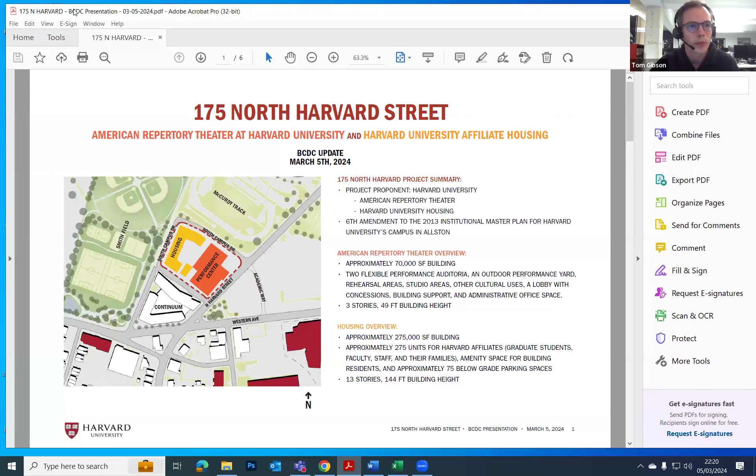Hi everyone, this is Tom Gibson from Haworth Tompkins Architects based in London, as you can probably tell from my accent, and let me share the screen. Sorry, I thought Tyler would be doing a quick introduction, but I'll dive right in. Hey Tom, I can talk now, but I'm Mark Hanley from Harvard University. I think the context is fully covered. We've seen BCDC subcommittee and the full committee on the 5th, as was just mentioned, and I think the narrow presentation is quite comprehensive. So Tom, I'll kick it right over to you and we can give the brief presentation.

Brilliant, thanks Mark. I'll very briefly remind everyone about the key stats for both components of the project. As you can see on this site plan, a reminder that the ART Performance Centre is on the eastern side of the block along North Harvard Street, with the Harvard Affiliate Housing Project on the western half of the site. The ART is approximately 70,000 square feet, with 2 very flexible performance auditoria, an outdoor performance yard that was the subject of discussion, and a host of supporting uses including a lobby space active throughout the day, about 3 stories in height. The housing component is approximately 275,000 square feet, 275 units for Harvard affiliates, and about 13 stories high.

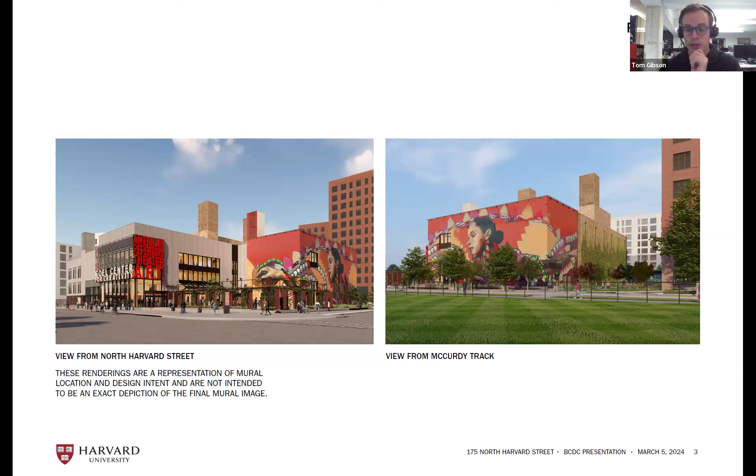We're just about to start a really exciting public art process for the large-scale mural. As you can see, these images show it wrapping around both the east and western sides to define that northern massing, addressing the views from North Harvard Street and Smith Field and across McCurdy Track. We're working with artist Pro Black, who did the Greenway mural last year, and we look forward to continuing the dialogue with the urban design team at the BPDA on the exact artwork as it emerges.

Finally, on the ART, before I hand over to Debbie from Marvel, the yard enclosure and the programming of the yard space itself has been subject to a lot of conversation. The cross section in the bottom right shows a 9.5 foot high solid enclosure with a series of hinged double doors that can open up to make it a porous space, or closed off for events depending on the programming. At high level, we have a lightweight armature used for fixing speakers and lighting, deliberately designed to announce the space as a working outdoor studio. The whole enclosure is softened with a trellis and vertical climbing plants, and you can see the edge planters on the plan on the left hand side.

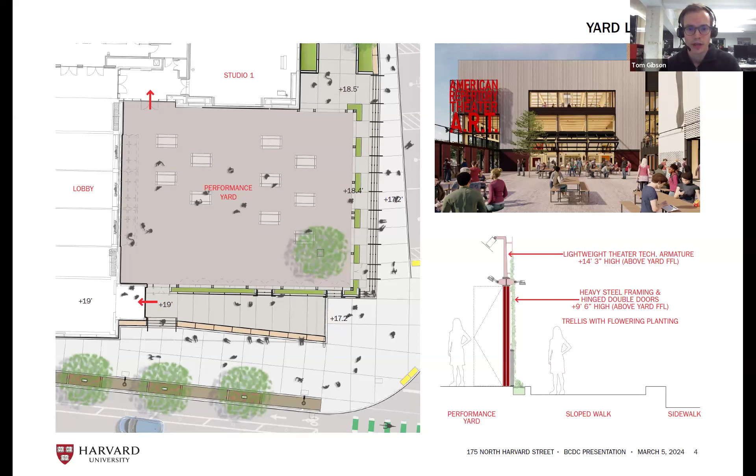You can see here the materials we've selected are meant to convey a sense of durability and permanence typical of Harvard buildings. All of the materials we've selected are sourced locally to comply with our rigorous Living Building Challenge and LEED requirements. We worked closely with brick manufacturers to find brick blends that feel contextually appropriate to both the Allston neighborhood and Harvard's historic red brick campus. The granite watercourse, pavers, and gray metals evoke similar palettes in the area, and blue townhouse doors add a pop of color at the residential scale.

In response to feedback from BCDC and BPDA to make the building feel lighter, we've added the light gray base at the townhouse level and moved it up a bit. The middle of the building is the red university blend brick, which we've detailed to break down the scale through a woven pattern with brick articulation. At the top of the building, we have an articulated brick cornice which completes the woven pattern. Our intent is that as the sun moves throughout the day, light and shadow will emphasize the woven brick textures and depths differently over time, allowing the building to mark time as it passes. We will continue to work with BPDA throughout the visual mockup process to optimize the legibility of this woven texture.

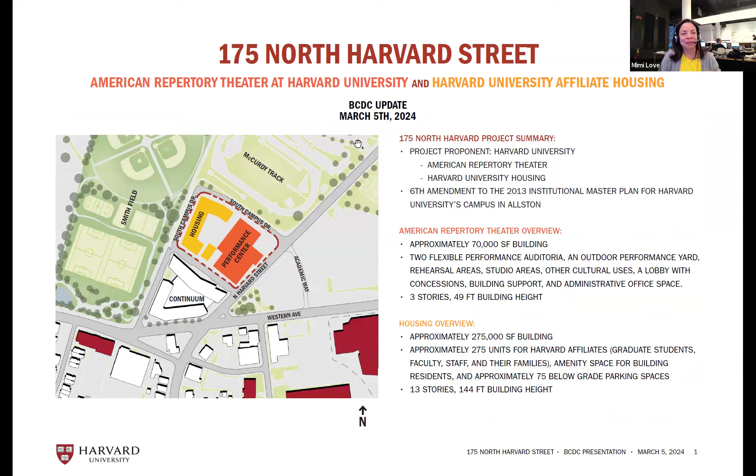Maybe if we go back to the site plan, I was really excited to see this project again, because when we last left it, maybe a zoom in of that landscape plan, we definitely had some concerns, and I was very much looking forward to seeing the development of the landscape in the quad space, and that central space between the performing arts center, ART, and the housing.

And while I can see that it significantly changed, if you can go to the rendering with the former lawn that is now a deck, perfect. So there's been significant changes. They still feel a little bit conceptual to me. And I was hoping that in this presentation, we'd see a little bit more development.

And in particular, I'm just looking around the edges where I see the playroom, the gym, the lounge, all touch where there's a zone of green that touches these spaces that really should connect indoor to outdoor. It seems to me that this is still very conceptual and schematic. And I would hope that as you continue to work with the BPDA on developing the landscape, there's a lot more attention to connectivity and the porosity of inside and outside. And just thinking through all of the spaces, it's too zoomed out to honestly talk about it in depth, but I was hoping to see a little bit more development in the landscape, because that was pending when we last reviewed this project.

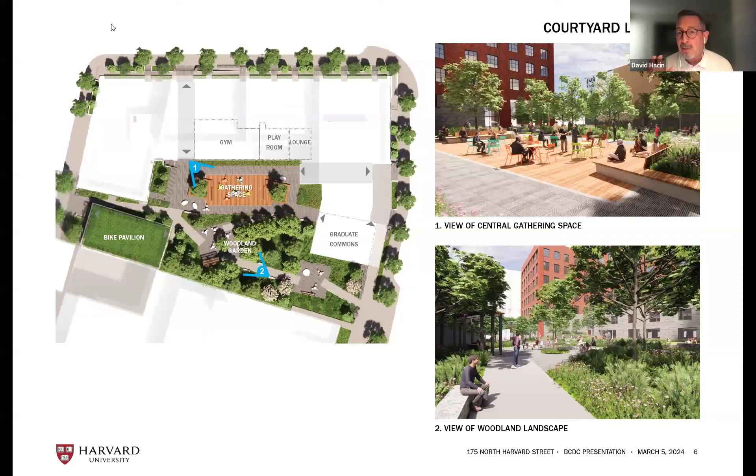I just wanted to say, Debbie, that I see now what you're talking about as I look closer. I don't know if it's an issue of cost, but I love that idea and I would hope you can make it a little more emphatic so that it reads. For all the conversation about sun, we don't get as much as we would like, and I think some of those details need to be a bit more pronounced in a gray Boston context in order to read clearly. So anything you can do to pump that up would be great. Just my thought.

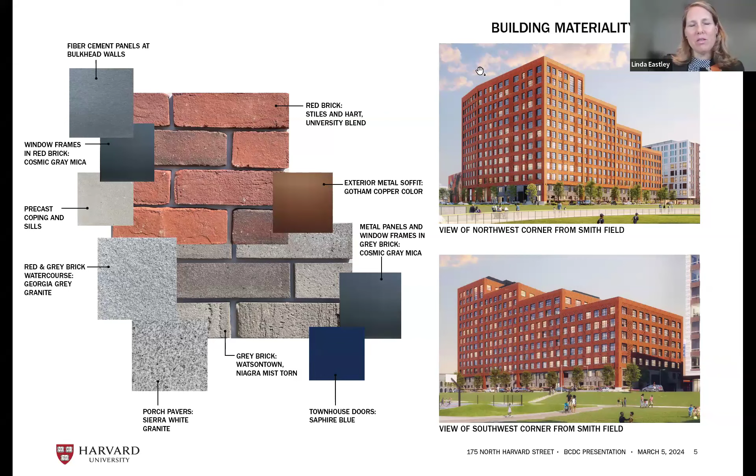But I think the notes that both Mimi and Catherine shared are really important, and I'll add my own, which is that the landscape doesn't feel as holistic as it could. It feels like there are individual moments linked together with a path, but the programming could be a lot stronger. This could be a really wonderful space, not only for residents but also for art patrons, so really encourage you to continue working with the BPDA on strengthening that.

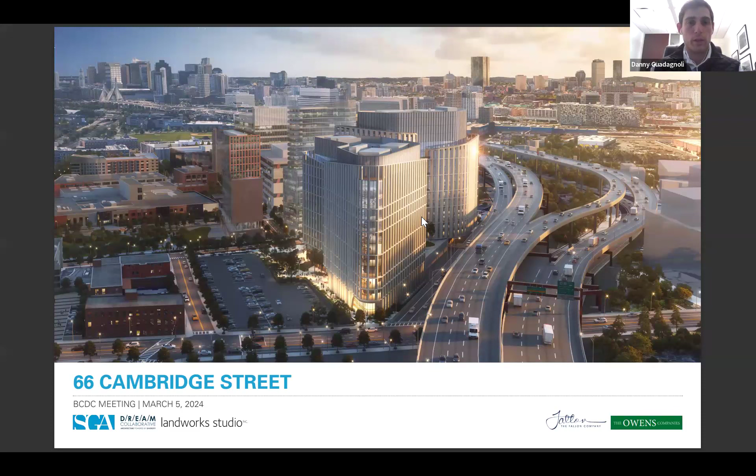Can everyone see my screen okay? Yes. Great, great, excited to be back. Commissioners, BPDA staff, thank you for the time tonight. We're grateful to be back at full committee. My name is Danny Guadagnoli, I'm with the Fallon Company, joined by several colleagues as well as Joe Mamayek from SCA and Andrea Veruti from Landworks Studio. We're here to talk about 66 Cambridge Street, so we'll jump right in.

Here's the project at a glance, just to refresh everyone's memory. It's a 2-building scheme, 812,000 square feet of development geared towards life science and R&D uses, about an acre of open space. If you're looking at the page, to the right is the north building, to the left is the south building, and I-93 runs north to south behind the two buildings. From a site plan perspective, a couple big things to highlight here.

This was really the relationship our site has between Hood Park on your left and the MBTA Sullivan Square station on the right. Right now this is currently a parking lot and really not navigable for pedestrians. So we wanted to create a pedestrian spine that was the backbone of the project, buffer against the highway using the buildings, and a really great front door experience here on D Street.

In terms of process to date, we're very grateful for all the feedback and engagement on this project from the group, from the BPDA, and the community. It's been about a year since we've been at full committee. Tonight we're focused on these last few bullets, which is what we heard at the last subcommittee meeting on February 20th. I'll walk through them quickly, then we'll jump into the specifics.

The first one is the building entry canopies, making those feel more in line with the overall design of the building. The second bullet is continuing to refine that secondary language within the arcade and improving that human scale design for the pedestrian. And then lastly, pedestrian safety and comfort. We heard some great feedback on the Cambridge Street corner specifically, so we'll get into how we address that as well. And with that, I'll hand it over to Andrea to talk about the public realm.

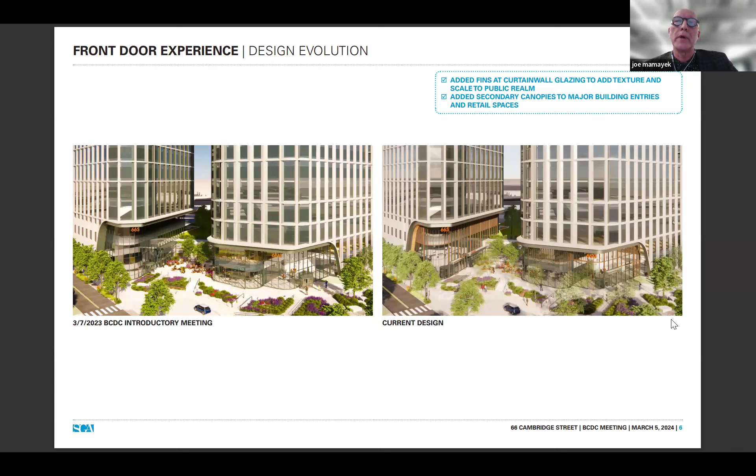They complement what is happening from a retail opportunity and around the main entryway. You can see the graceful transition to the resiliency level, and we've added the architectural fins for that human scale, and also the warmth that is added and works with the nice material choices of the soffit.

One of the big items that we looked at was the arcade and the number of columns. By eliminating every other column, we actually increased the transparency, the natural light that goes into that space, and the sight lines in and around that, which really unified and enhanced that public realm experience.

In terms of the human scale strategies, there are a number of things we've been working on through the last couple presentations. The green items are really the landscape features, the enhanced landscape beddings at the columns, and the canopy trees on the left-hand side. In terms of the architecture, we introduced the architectural fins, we have a digital display, and we have unified all the design for the handrails. Most recently, we had commentary about the lighting.

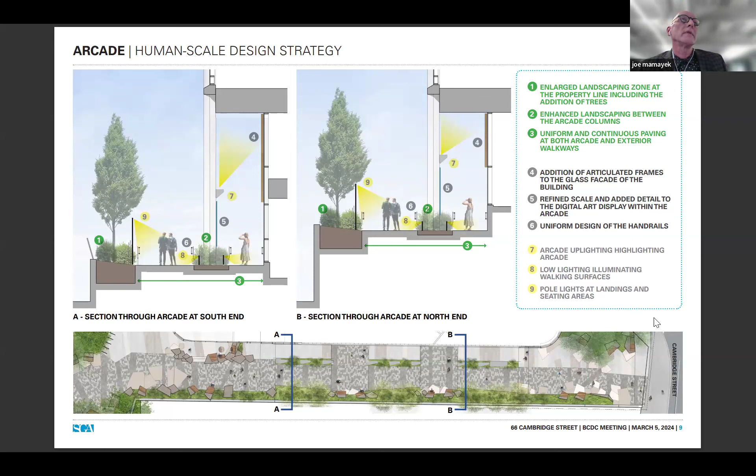In terms of the design evolution, you can see where we were a year ago, and on the right-hand side where the design is currently. You can see by the elimination of the column how that really opens that up, connects the shared pathway with the arcade itself, and lets you begin to appreciate the landscape features as well as the architectural elements that are currently within the arcade itself.

There are a number of complementary views in and around that arcade, some on the outside, a few just on the inside. It's a holistic approach to really make this an improved public realm experience that happens within that zone.

And then the gateway—this point was really key to a lot of the conversations. You can see where the design was on the left-hand side, and on the right-hand side where we increased the scale. We have a 2-story expression ray at the base to start, and that nice articulated canopy that then transitions to one language as it goes into the arcade itself. You can see the architectural fins that come around and give that added scale.

All of this is really featured on and focused on some of our original design initiatives, which is to have that sight line to the Hood stack that you see just beyond.

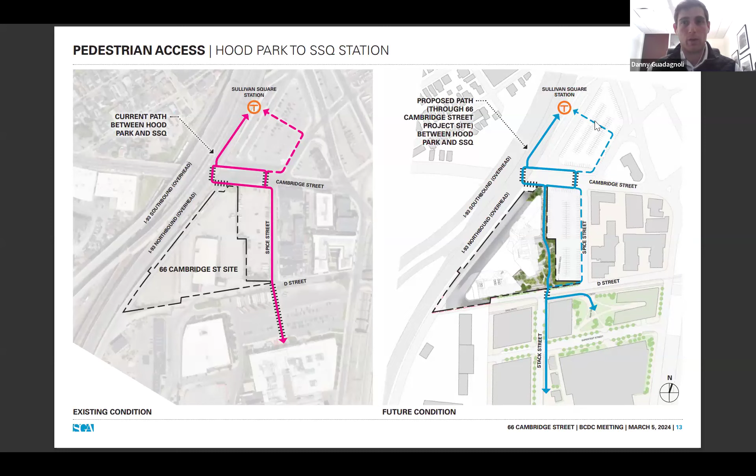So to zoom in on that a bit more, this was really the area that got talked about a lot at our last design committee meeting, and it's very important to us that the safety here is prioritized.

So what we've done, talking to our team at Howard Stein Hudson, is work through a strategy for how we can shorten this crosswalk from 84 feet to 55 feet, in coordination with various agencies—that's something we're committed to. We're also reducing the length of this other crosswalk and straightening it along Cambridge Street, from 62 feet to 55 feet. So those are two major moves.

Thanks, Christina. So those are two major moves we think really enhance pedestrian safety and the directness of that path.

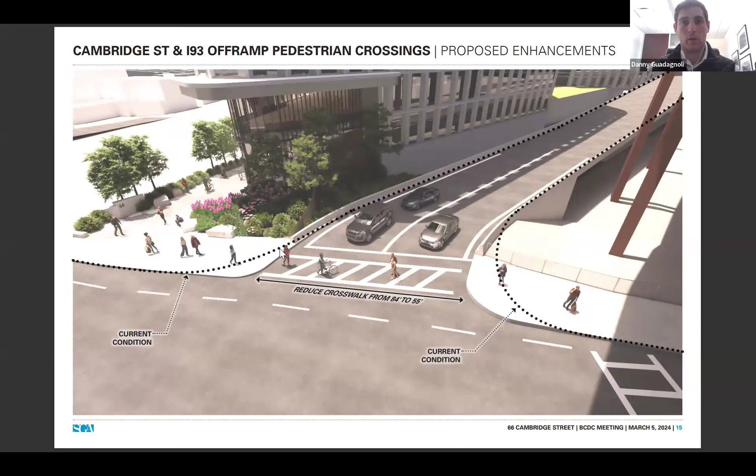You can see here it really does make a huge difference—this dotted line is the current condition, and we plan to bump out these curbs and shorten this substantially. What we've already done, and continue to study, is making sure pedestrians from this platform have a good sight line to see cars and a safe area here as they approach the crosswalk.

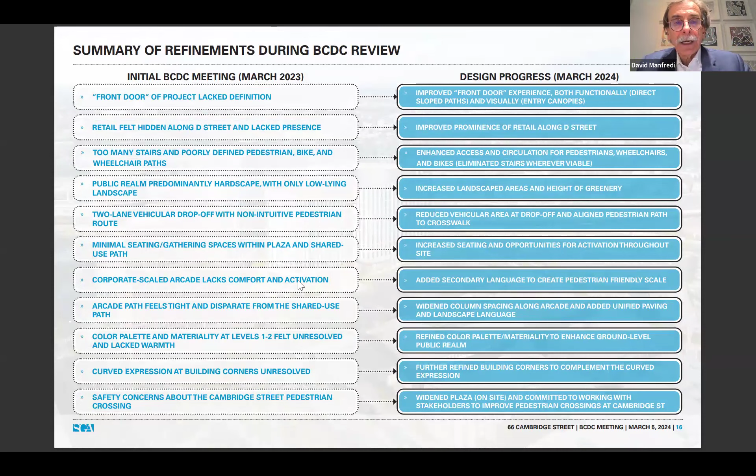First, thank you for your responsiveness. I was at the last subcommittee meeting, and a couple of things you've done I think are really to the benefit of the project. The entrances we talked about very specifically felt attached but not integrated, and a little bit foreign. You made them so much better by simplifying and minimalizing them, and it feels so much better in that context.

The other thing we talked about in subcommittee was the arcade and eliminating every other column. I don't know that I fully saw it last time, but there are two benefits: one, you increase the openness of the arcade, which I think will increase its usability as well as safety, and bring daylight to the ground floor of the building. The other thing I just saw tonight is it allowed you to let all of the remaining columns go to the ground instead of the intersection of the column and the curve, which I didn't realize bothered me until you took them away, and then I felt so much better. So there's a clarity there that's much nicer.

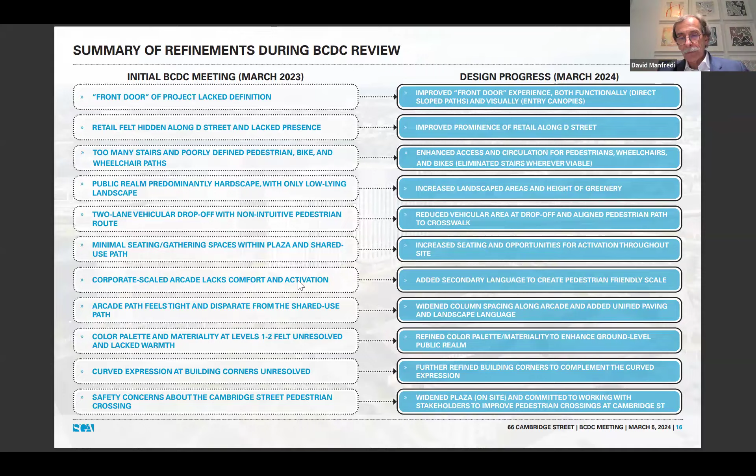There is something in that rendering that bothers me a little. It bothered me the other night, and I'll let my landscape colleagues be more articulate about this, but I think you're creating that zone between the columns with the planter's edge in order to solve some issues between the grade of the building and the grade outside the building, and you need to do something like that. But every time I look at that close-in drawing - yeah, this one, the lower right - it just feels like the green is sort of in prison, captured. I suspect your slopes are such that you need the guardrail and all of that, but I do wonder if any of my landscape colleagues has a better solution for that.

And then my last comment is, if you could go to the intersection we talked about so much in subcommittee - I think this is a tremendous improvement, reducing that crosswalk by almost 30 feet. But let me ask, where are you in the process of being able to do something like that? Do you have BPDA transportation, BTD support? Are we looking at a solution you can really implement? Because I think it's night and day. I want to see it get done, and I know these things aren't easy to get done. So where are you in that process?

I'm wondering, as Anne Marie and other comments come in, can you put up a site plan for us from your slide deck? We don't need to look at roadways at BCDC. Actually, I think we're all excited to see that, since we spent a lot of time on this at subcommittee.

It's a shame I wasn't on a couple weeks ago because this has been in the works, so it would have been a much easier response, but I was on vacation that week with the schools being off. No problem, glad everyone's vision is aligning here, and glad you could join tonight.

Anne Marie: Thank you, I think this is the first time I'm seeing this project, so I appreciate all the effort from both the proponent and my BCDC colleagues and BPDA staff. In looking at it, I still have some concerns about the overall palette. It still seems a little monotonous to me. I'm looking for a bit more; it feels a bit corporate. The only differentiation I see is in the flowering plants.

So I'll defer to my colleague Commissioner Solano on the landscape, but I'd like to see more texture. I was looking for the building entrances - I assume the entrances addressed in prior subcommittee meetings are the gateway into the site. But thinking about the pedestrian experience, these changes feel very fine-grained. It would be nice to see more texture providing diversity in the building. It's a very uniform palette, and some differentiation would help strengthen the design.

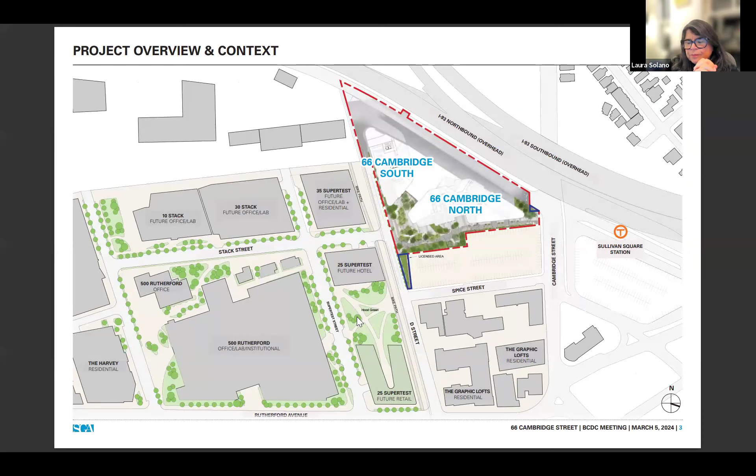Thanks, Anne Marie. Laura, I see your hand up. Yes, can you hear me? Yes. Oh terrific - could we take a look at the perspective that shows the reduced columns?

I think it's an elevation - yeah, we had an early one. There, we go side by side. Oh, I'm sorry, I apologize. Go back to the one you had up - that shows it better. And while you're doing that...

This is perfect. I wanted to thank David for bringing up something that's been gnawing at me, and I wasn't quite able to identify it - it has to do with those plant beds around the columns. I think it's important how those columns come down and hit the ground, and I'm not sure these plant beds, reduced even more by the lessening of the columns - which was the right thing to do - whether they feel like leftover pieces. Could you take that land, it's not much, and add that landscape to the other side so you can get a little more room on that important edge that looks over the parking lot?

Just let the columns come down. I think the grade inside the columns and the grade outside the columns is the same, but correct me if I'm wrong. Correct. Yeah, and if you think about people moving through the space and being able to weave in and out of the columns - in the rain you go under it, come out, and want to weave back and forth - I think you'd get a lot more depth and strength to the edge against the parking lot if you took whatever real estate is given to those plant beds and shifted it to the edge.

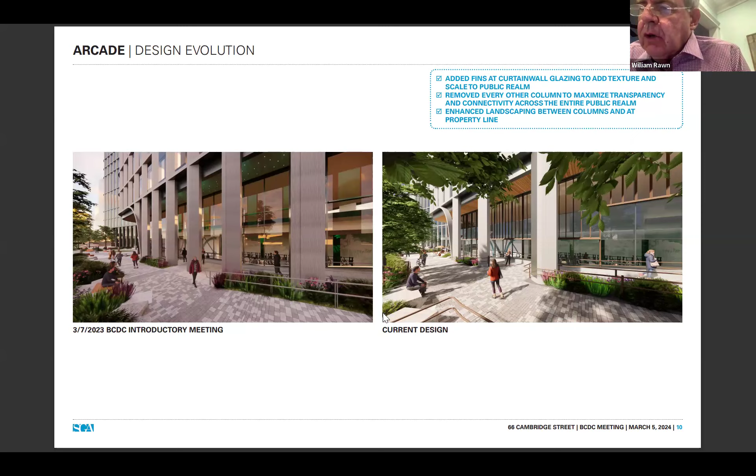Laura, thanks for your comments. Bill? Yes, can you pull out the crosswalk diagrams again?

Yeah, this one for the moment, and then we might look at the other. I appreciate, like David, by the way, I appreciate some of the people cross the crosswalk, the first 55-foot one that used to be 84, and then they walk a little farther, and then they turn right to go across the street to get to the T-stop.

And this is in shadow. And how safe is that really? And then, of course, they have to turn right again and cross the exit ramps of the buses as I read the plans of the T station, and all to connect what should have been an easy connection to the Hood project farther down the Rutherford.

And so then I ask, what happens if you, in this diagram, deal with the crosswalk that's over on the right-hand side? Is that something that you might, if you could point to that with your cursor, over to the right, near Spice Street, near this one? Spice Street, Bill? Right there.

Is that indeed possibly a safer way to cross a really difficult site condition? I don't know the answer to that, but I'd hate to have something we've done that's predicated on a series of unsafe crosswalks. So I just ask you that.

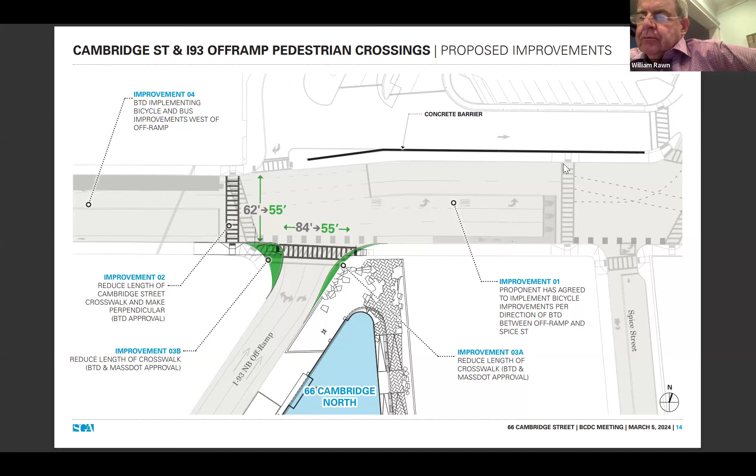Okay, that's good to hear. And I will leave it in your capable hands. Bill, thanks for your comments, and Seth as well.

I don't see any other commissioner hands. I'll just add a few comments, and then Christina, we can ask for some public comment.

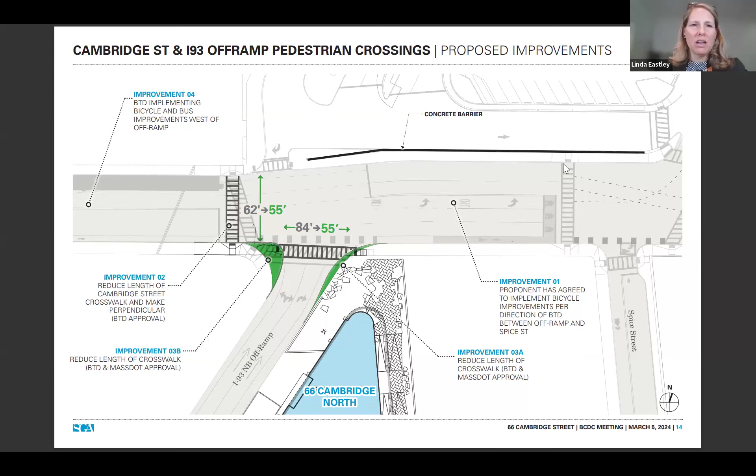I think there are some really clever things this team is putting together in this project, and I wanted to commend you on being great listeners and doing some experimentation with us, responding to our comments and requests. The first clever thing is the extension of Stack Street and the way you're interpreting that vehicular way, transitioning it into what I think can be a really powerful, strong new pedestrian path for Charlestown.

So appreciate that. The second is the entries to the buildings. We spent time at subcommittee talking about those, and I think they're incredibly improved. Before they were a distraction, and now they become part of the overall feel of the facade. The third is really the gateway.

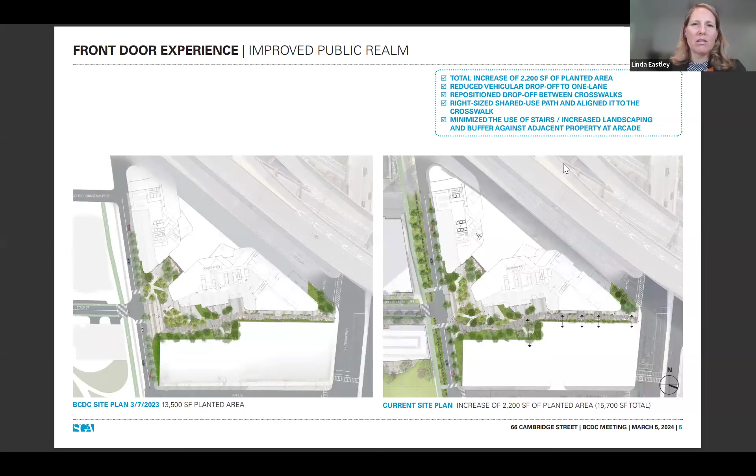I wanted to thank you for really continuing the poetry of that arc that we see on the Plan West on that corner. I think it's so much improved, and also the incorporation of the warmth of the materials.

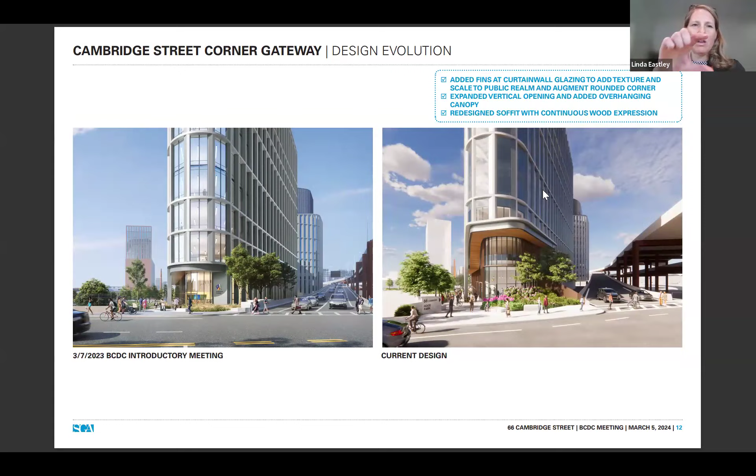I also had the same response that Laura did to the railings going around the column. I really like where we ended up in the conversation about having those hit the ground unimpeded, and maybe even thinking about, if those plant materials are removed, introducing some warm materials along those vertical surfaces, as you have between the ramp and the walkway.

Christian, do we have any public comment?

Christian? Is Christian able to... Yeah, I was muted, sorry. Oh, there you are. Okay. Can you see my screen or not yet? Yes, we do. Okay.

Before I start this presentation, I would like to acknowledge the positive reaction we have been given in this process, both from the BCDC and the BPDA. These have been extremely helpful for this final version that we are presenting today.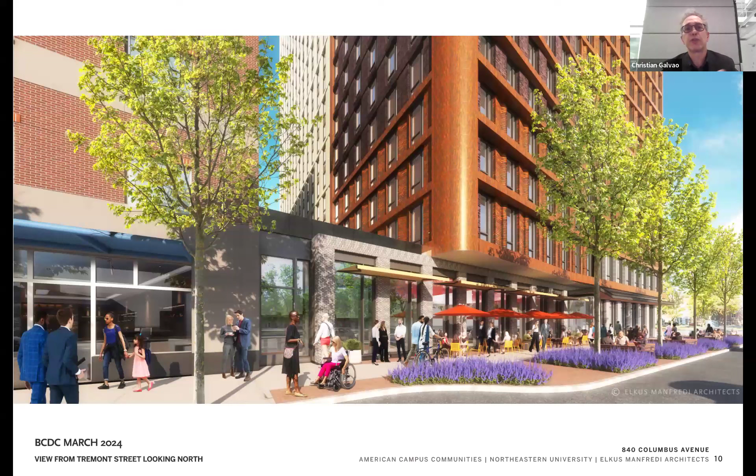A view from Tremont Street showing how the podium level slides below the upper floors to meet the base of the Renaissance Park building. There is great vitality and energy on the public ground. Then the view along the Melnea Cass sidewalk showing the operable doors, the porosity, and the activity on the public ground and sidewalk.

We looked at the neighborhood material palette, seeing that historical variety and richness of the brick and stone. So we put all that experience from walking around the neighborhood into creating our palette, showing more textures and tones that we put into our building.

Here's a long view along Columbus Avenue, showing our three main building components, identified by different material finishes on different facades.

A long view from Tremont Street, showing the proposed massing and the Crescent parcel on the left, the future project of Crescent parcel, then our reduced Tremont Tower, and the treatment of the tallest building of the tower.

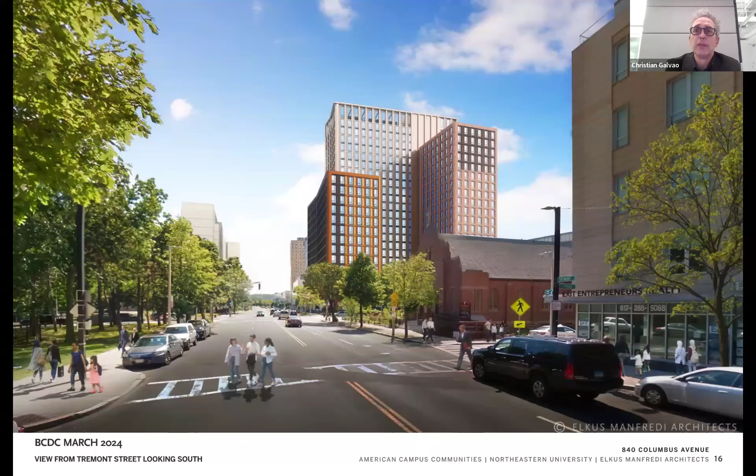A closer view of our building on Tremont Street, then a long view along Tremont Street looking north. Moving a little closer, the Renaissance Park building and our building beyond that. The last view is a long view from Shawmut Avenue looking west.

And now I'll introduce you to Carl from Arcadis.

Carl, you have just over 2 minutes. Carl here. Is Carl in our attendee list, Christina? I'm scrolling right now to see. I'm sorry, I'm doing the same. I saw that he just became a host. So Carl, can you unmute? Oh yes, there he is. Oh thank you, can you hear me? Yes, yes we can hear you okay. I've lost 30 seconds of my time. No, that's okay, I paused the timer. Go ahead, you have 2 minutes. Thank you, Carl Freshour with Arcadis Landscape Architect.

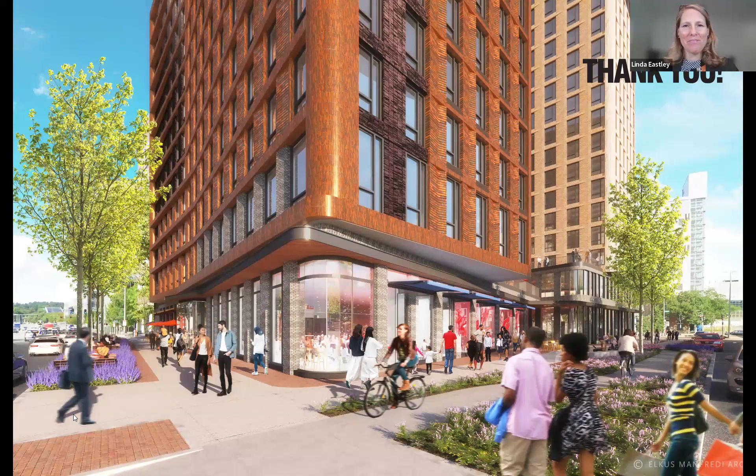Thanks for that presentation. Commissioners, we're ready for your comments. Again, David Hassine, Kathy Kotaritis, and Kirk were at the most recent subcommittee, so we would invite those commissioners to offer comments first.

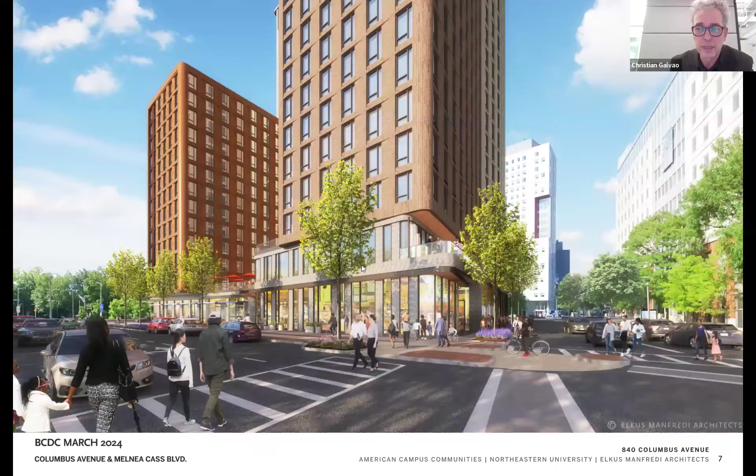Good afternoon, good evening. There's a bird's eye view of the schematic of where everything lands. Can you go to that slide? I didn't see a page number, so—the beginning, the axonometric. Oops, no, actually not that one. What am I trying to say? No, it was towards the end, I think just before the thank you slide. Oh I see. Sorry guys, keep going, I love you, I promise.

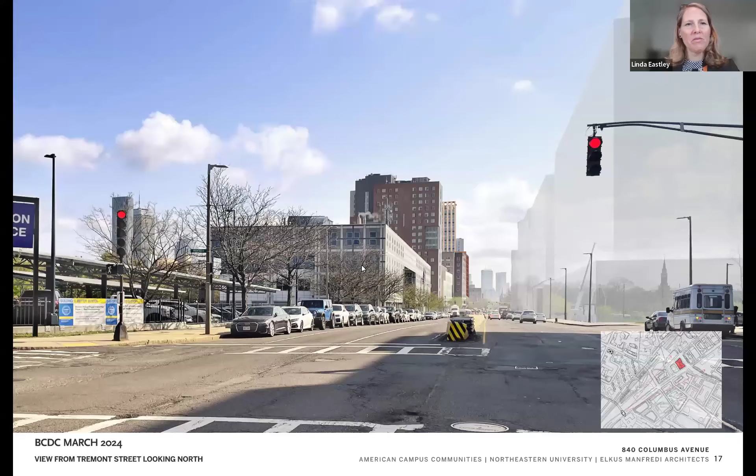I'm sorry, I don't know what it's called, but basically it's the bird's eye view of the building directly down, where it lays out all the sidewalks and things. Oh, like a plan view or a site view. Thank you, site view, sorry, I'm still learning the language—maybe it's the site plan, Christian. It's okay, no problem. Got it. Here, there we go. Yes, love you, thank you so much.

So that corner of Tremont and Melnea Cass—what I appreciate is the bump-out extension of the sidewalks and the intentionality around the bike paths and kind of the passageway that's interior. My concern is actually opposite of Commissioner Katarides: the lingering on the corner, because it is so busy and people travel very fast.

I'm actually more concerned about safety, because when that light turns green and people are whipping around that corner, I'm concerned about what else may need to be there, especially as Melnea Cass—I won't say is a speedway, but the fight to get in that far lane will look as if people are coming towards you if you are lingering on that corner.

Not sure much else can be done, but considering the reimagination of this corner, that's an actual concern I have. I'm just encouraging you all to think differently about how to either raise that corner a bit or adjust it so it doesn't feel like a 3D picture getting ready to bump you in the face, because those cars are whipping around that corner trying to race to get through the next set of traffic lights.

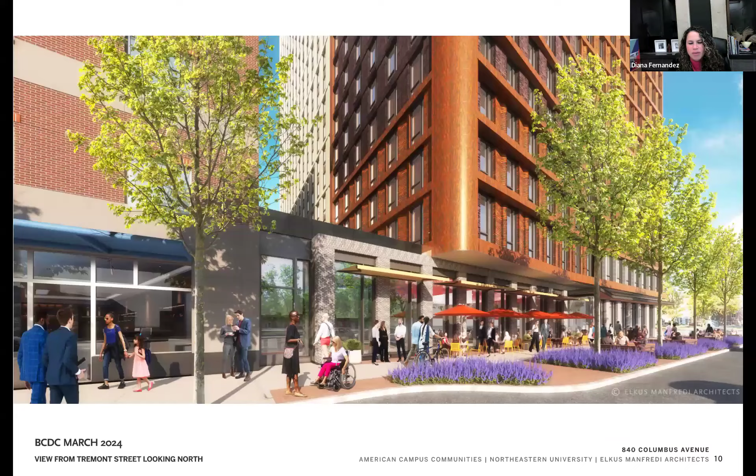I think if you go to the image looking down Tremont Street a little further up, the overall composition has evolved greatly in terms of responding to its context. Given the constraints of how much building envelope we're jamming into the site, it tries to bring a dynamism to the different levels here that respects both the Melnea Cass space and the broader cadence of height in this area, integrating that into the overall experience. So I do think Jonathan's comment is great here.

It's just, looking further at that Melnea Cass space, which is really an iconic gateway, not just from a vehicular standpoint but also as we look to make improvements to pedestrian crossings here, I think will become very important. If Northeastern can speak a little about the program, in addition to the architectural moves, it's important for us to consider the activation of this ground floor, specifically for the community-facing program that could be a real asset to this particular neighborhood.

I'd be happy to. Really quick, I know we're out of time, but the ground floor will serve as a dynamic center for community engagement through economic development programs and initiatives. The way we already do a lot of outreach and community partnerships and partnerships with non-for-profits, they're kind of spread out across the university, across the departments. So the idea would be to bring all of those initiatives to the ground floor of this project and create programming in three categories: educational access, jobs and workforce development, and small business support, either local retail or incubator space, maker space.

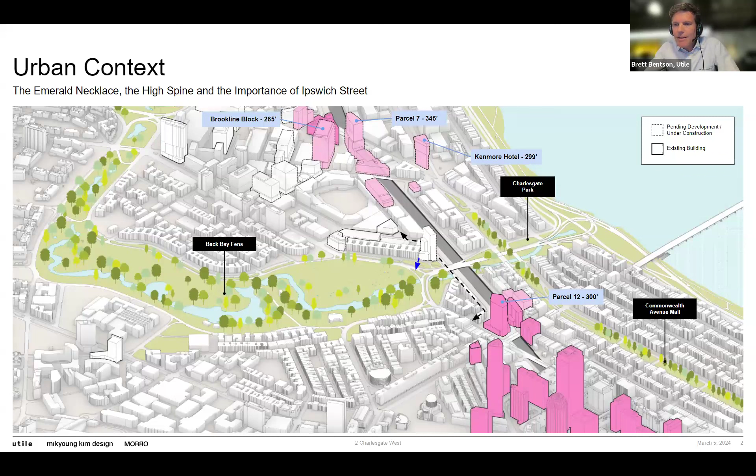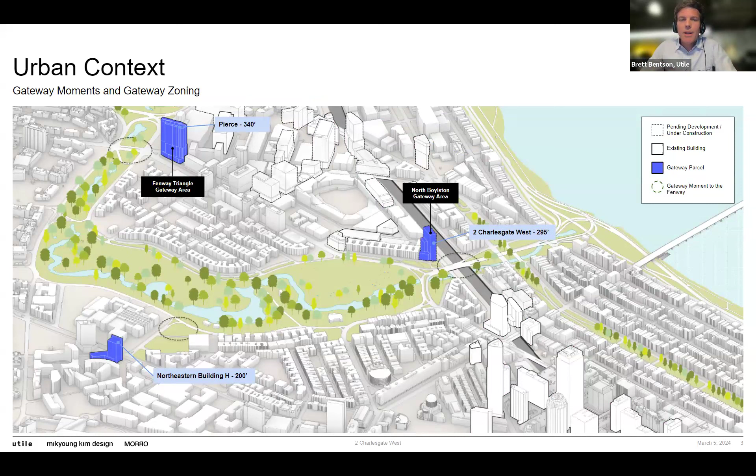At the neighborhood level, this site, together with the Fenway Triangle where the Pierce is located, was identified as a gateway parcel as part of the 2002 rezoning of the Fenway. Together with Northeastern's Building H, these three parcels form important gateway moments to the Fenway neighborhood and the Back Bay Fens parks. Just like Building H and the Pierce, we think it's appropriate for a finely designed and tall building to mark these important moments in the city.

It also allows for a new public connection linking Ipswich Street with the Back Bay Fens, replacing that cramped pedestrian desire line alongside the site. This lost floor area is replaced on the upper floors.

We further adjusted the massing to limit the building height along Boylston to 70 feet to align with the neighboring pre-war buildings, and concentrate the additional height along Ipswich, where the impacts of shadows fall largely on the turnpike.

The proposed massing reflects three major themes: a generous public stair open to the sky and an enclosed public elevator connecting Ipswich and the Back Bay Fens; a wing along Boylston that is responsive to its pre-war neighbors, both in materials and massing; and a taller wing along Ipswich that provides a distinctive architectural design to help mark this important city gateway, but is also limited in its impacts to the immediate surroundings.

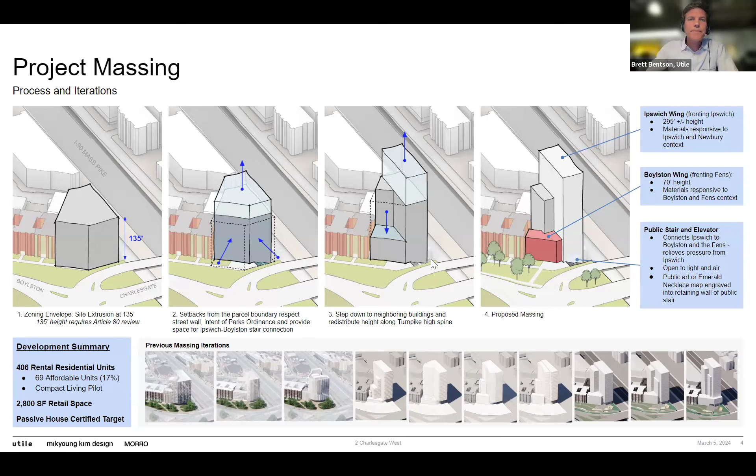In the 1960s, the Bowker Overpass was built, which completely reconfigured the area in front of our site, creating what's essentially a highway embankment embellished with trees, and that condition continues today.

However, MassDOT is advancing plans to rebuild the Bowker Overpass and create a new multimodal bridge that links Com Ave to Boylston and Charlesgate. What results is a roadway and sidewalk that moves closer to our site, though still not the tree-lined parcel edge that was originally part of the Olmsted design.

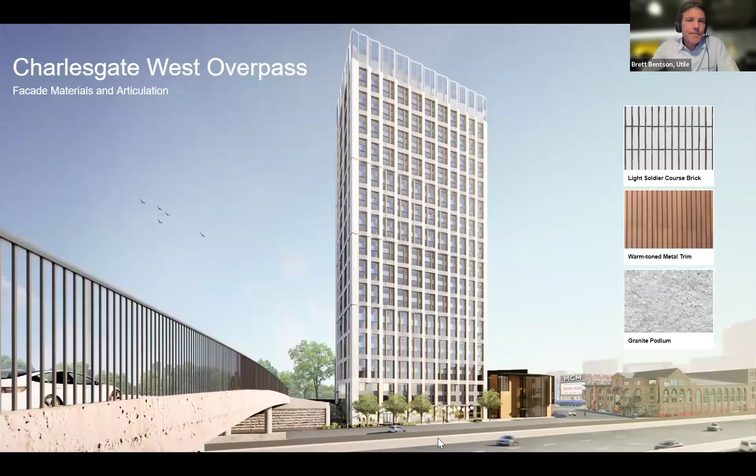In this view from the new Charlesgate Overpass, the massing of the tower emphasizes this location as that important gateway into the Fenway. The tower meets the ground on a granite base at the lowest three floors that relates to the original Olmsted-era granite bridge embankment.

The upper floors use a light-toned brick arranged in a stacked soldier pattern. Windows are grouped into 2-story openings, and a warm-toned metal panel surrounds each of these bays, also providing a staggered vertical fin every 6 floors.

At the top floor, the cladding transitions to clear and fritted glass that extends to form a screen around the rooftop. The facade is subtly folded in and out in plan, so different faces catch the light while the plane of the window wall remains flat. Each bay has a deep window jamb to give the facade some thickness. Also in this view, you can see the public stair that links Ipswich and the Fens on the lower left.

Continuing on the lower Ipswich Street level, the goal is really to improve the pedestrian experience along Ipswich. As mentioned on the previous slide, we're proposing to extend the curb line north to accommodate additional sidewalk and planting area, as well as a building drop-off adjacent to the residential lobby. We're working with the city to ensure that anything we propose aligns with the ongoing Fenway Transportation Action Plan that's in progress.

The additional sidewalk area also allows for a seating area to receive and celebrate that public stair connecting from the Boylston level, and the additional planting area offers opportunities for street trees and some localized stormwater treatment.

Moving up to the Boylston level, I'll again note the public stair that will connect the Boylston Street and Back Bay neighborhood to Ipswich Street and Fenway. The material treatment of the sidewalk leading to the public stair matches the adjacent public sidewalks, which helps signify that the stair is intended for public use. In front of the building, we're proposing a small public-facing plaza space with some linear seating elements and a really simple natural planting palette.

We also think this is another great opportunity for stormwater treatment, and we're proposing a small bioretention area at the south side of our site. From a material standpoint, we'd like to utilize materials that are in keeping as much as possible with the Emerald Necklace - looking at natural stone, crushed granite, and a native plant palette.

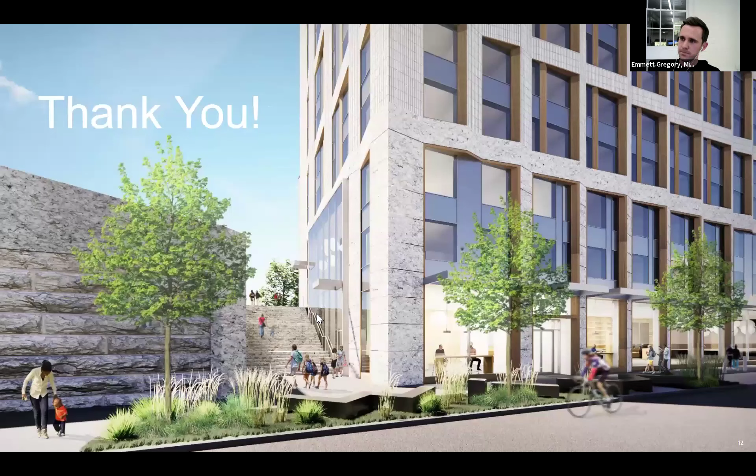And with that, I'll turn it back over to Brett to talk about the architecture piece. I think we'll just say thank you. Yeah, we're over time. Thanks. Sorry about that.

Brett, was there anything you wanted to add before I turn this over to urban design comments? No, I think we'll probably come back to the site plan and happy to answer any questions. Appreciate you. Seth, are you able to step in to give comments from urban design? Yes, I can. If we can bring up the urban design slides, please.

This is Seth Riseman from the BPDA. We've been working with the proponent team for quite some time to refine the approach to the site, and have been overall happy with the evolution of the project, particularly its approach to generating some site-responsive massing, particularly where it meets the adjacent neighborhood context, and then forming a tall gateway tower moment with some distinctive architecture along the highway and at Ipswich Street here.

We've focused mainly on the scale, materiality, and massing of the overall tower itself, with an emphasis on its slenderness and verticality in both directions, particularly minimizing the so-called bustle on the side of the building on the left, focusing on the materiality, scale, and massing on the Boylston Street side, responding to the historic context, and then contrasting that to the tower language with subtle material layering.

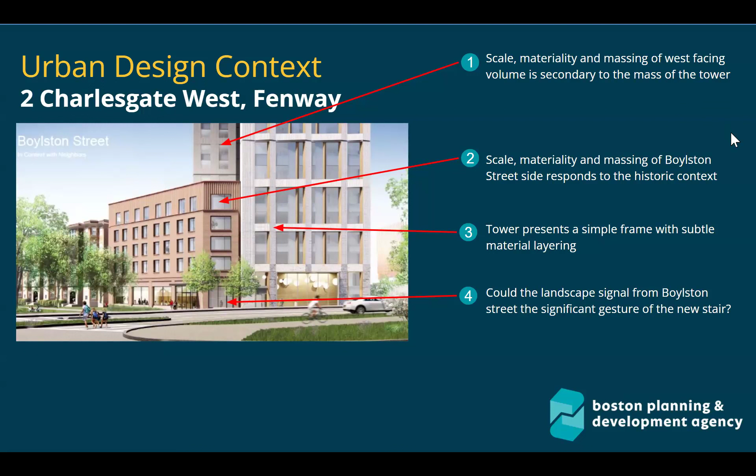The proposed height of the building does have wind and shadow impacts. So like every project that goes through Article 80 large project review, it does undergo a wind tunnel study. We work with the proponent to minimize those impacts, making sure there are no dangerous conditions and minimizing uncomfortable conditions, which we will continue to work with the project team on. Thank you.

Great. I think, Christina, that wraps up BPDA comments. It sure does. Thank you. All right, commissioners, comments for the team as we're thinking about sending to subcommittee.

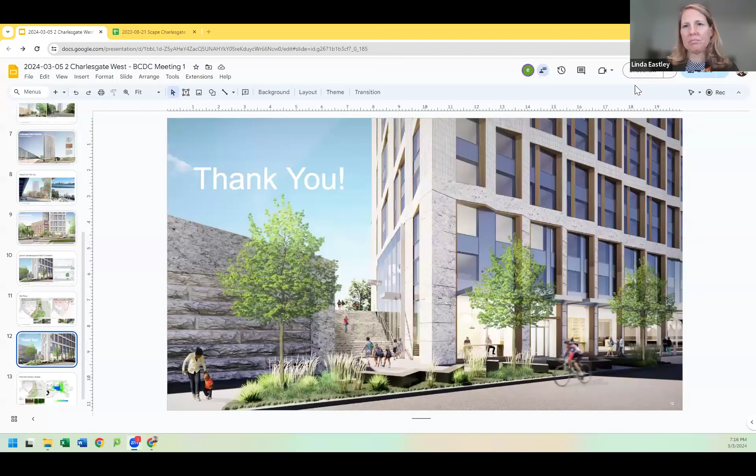David Hacin: Yeah, I'll jump in. First of all, thank you for a very thoughtful presentation. I very much appreciated the history of the context of the site. It's a site that I think we've all spent a lot of time looking at over the years, wondering how it could be better. I think that...

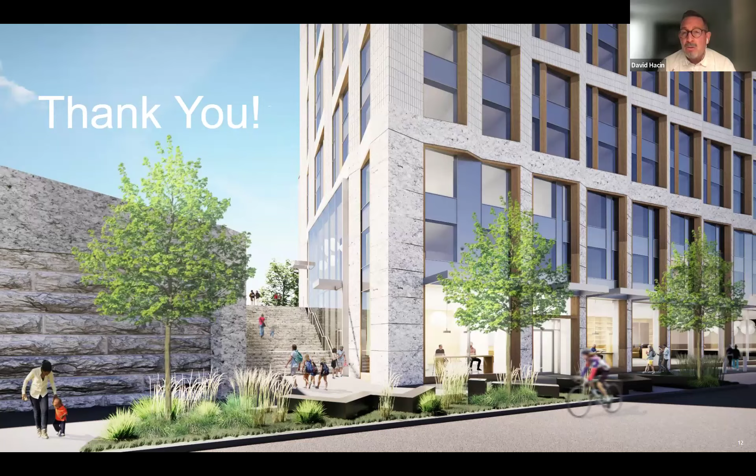I'm buying the urban design strategy that suggests that a taller, bigger building woven into the lower fabric of the existing historic street wall is appropriate at this location. And I think that the way you have massed the project makes a lot of sense.

What I'd like to see when we go to subcommittee is I'd like to understand the skin of the building much more. There's a sobriety about it that I think - some of the elevations imply an elegance that I'm not sure I'm completely getting in the 3D views, and I'd like to really understand the shade and shadow, the depth of the windows, the facade, the actual composition of the facade.

Relative to something a member of the public said at the last session - why are there so many square boxes silhouetted against the sky in Boston - I'd actually put that question to you here on this site, which is intended to be a landmark, a gateway. The building looks very elegant, but I wonder if it's actually a little too quiet, a little too elegant, if there shouldn't be some exuberance about either the thinner edges of the building or the top of the building, or both.

It feels a little quiet for the landmark status that it's justifying, in a sense, with its height - which is not to say that I don't appreciate how elegantly it's put together, but I'm worried that it's not landmark enough.

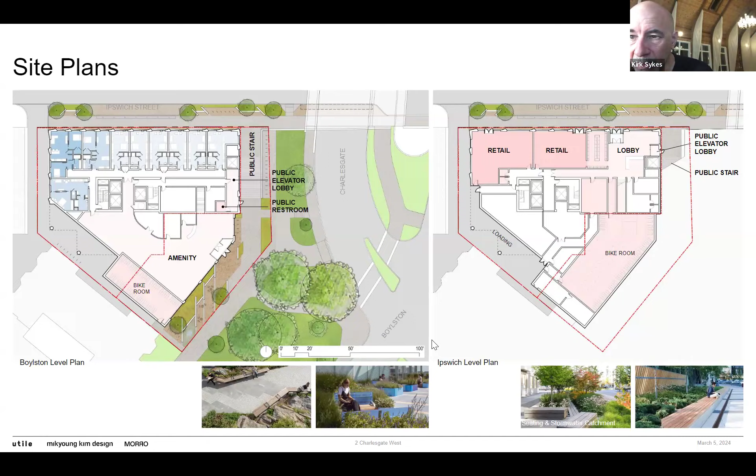The last piece I'd like to focus on is the second intermediate height and how that's treated. I don't fully understand it. Maybe you can go to the rendering, looking down Boylston. So it's a little hard to tell if the tower is meant to read free of that more than it does here, or if it's intended to be an appendage to the tower. It almost appears to me it wants to be its own thing.

And then if you could go to the intermediate scale building on Boylston where it connects to the row houses. Given the detail and the character of all the buildings that stretch down towards the Fenway, I'd love to understand again the materiality and the detailing of this brownish building that connects the tower. So those are the comments I have for you. Thank you.

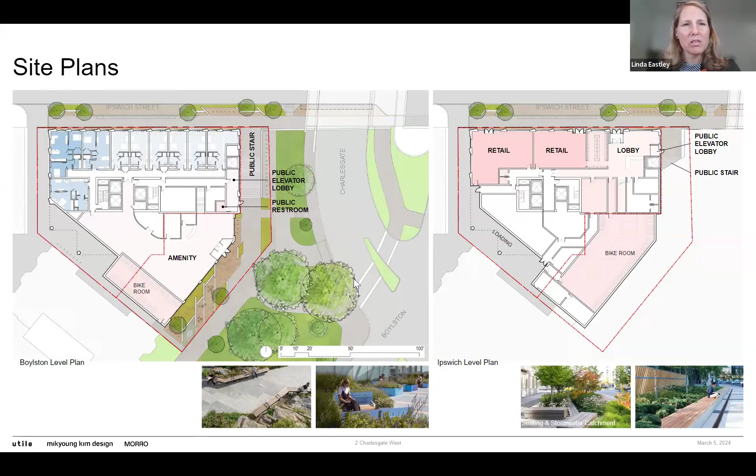Yeah, this is a great one. So I would love in subcommittee for you to walk us through maybe even some of your earlier massing studies to help us understand how that kind of mid-rise evolved. And again, the dialogue that it's having with both the tower and the base, and also with the context would be great. Two other quick comments.

One is about the stair, and it relates to the fourth comment. So the stair, and I appreciated all of the diagrams you shared. This is a great image. I'm wondering if you had considered making the stair a little bit more dynamic, meaning that it might have a flare to it rather than being so rectilinear.

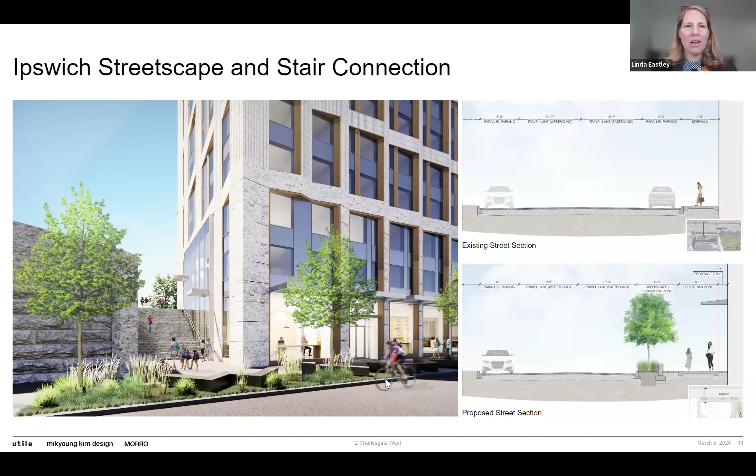And perhaps there are some constraints that we don't understand yet, but it relates to my fourth question, because I think that, Brett, you put up a really interesting series of diagrams, the evolution of this site, and one of them included the kind of Charlesgate redesign area. I think you had a 2025 date on that.

Help us understand at subcommittee the impact of that redesign, the overpass redesign, and how it can relate more to not only the building and the way that the building is formed and massed, but also the stair in particular, and the way that it helps us transition from all of those multiple levels. And also how the front of the building relates to the landscape. Laura was raising some of those issues.

Mine is really a sectional one. I'm trying to understand, as you come out of that amenity space, at what level are you relative to the street and the overpass and everything that's happening there? To me, it looks like it's a little bit depressed. And I'm wondering your thoughts about that, and whether you had considered bringing it up to street level in that case.

Thank you for the presentation. Christina, do we have any public comments?

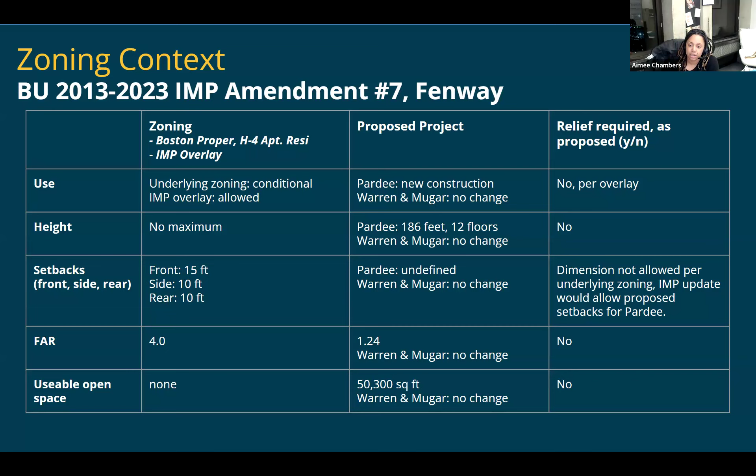So the 2013 IMP noted the location of the proposed Pardee School as a quote proposed development site. However, the massing was not contemplated or analyzed at the time. The amendment does not provide further planning context for the proposed Pardee School. So again, here we have a reference to the IMP itself, where the project was contemplated but not detailed. The renovations, again, were not identified in the IMP, which I previously noted. And we do just note that the Pardee School is just outside of the Chapter 91 boundaries, so the Chapter 91 policies do not apply.

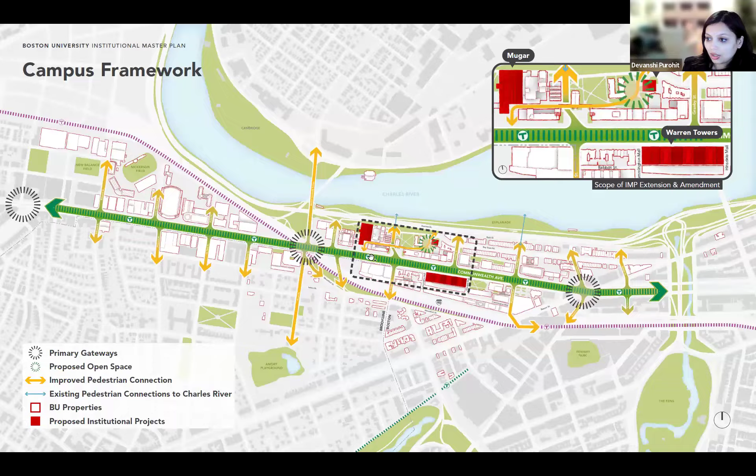So the first project, as Ken mentioned, is Warren Towers renovation. We are not anticipating any new additional GFA or any new additional height. This is the largest undergrad dormitory in the city of Boston. And there is a big embodied carbon story associated with it, because we are trying to not demolish it, but really renovate it and upgrade it to the current energy code standards, but also from an accessibility standpoint. And it's going to be, again, no additional height, and also consistent with the long-term planning for Cummington Mall, which will come in the next 10 years.

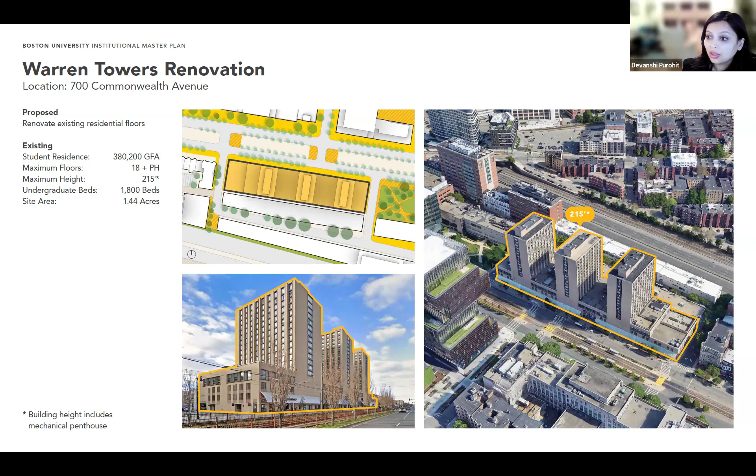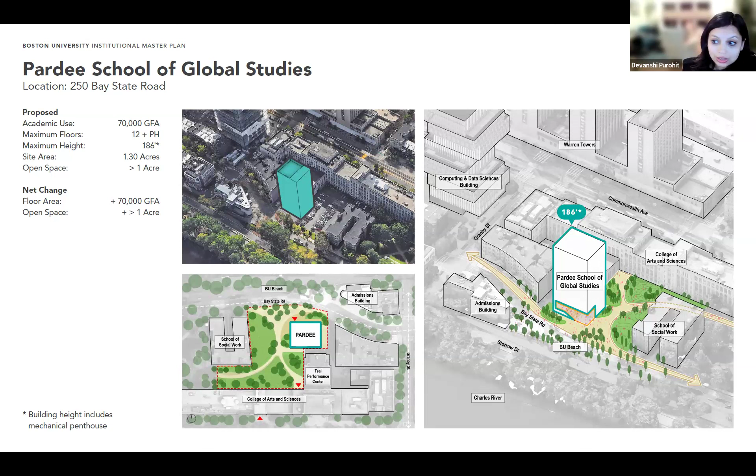I'll go a little bit in detail for Pardee School since it's a new construction, new project. It's a 70,000 square foot project, and the proposed height we are proposing to be 186 feet. It replaces the existing parking lot. So we are increasing the open space and connecting it to the existing academic core that already exists on the other side of the School of Social Work.

The idea here was really to utilize the existing parking lot, but maximize the open space, because there's a lot of need for spillover space for campus activation and outdoor campus activity, and minimize the footprint of the building so you're able to create more outdoor space, which would also create more pervious surface since we are replacing an existing parking lot.

The way we are envisioning a longer term plan is that this open space would eventually become a contiguous open space all the way from Pardee School to the law school tower, creating a more seamless connection both to the existing open spaces and to the Charles River.

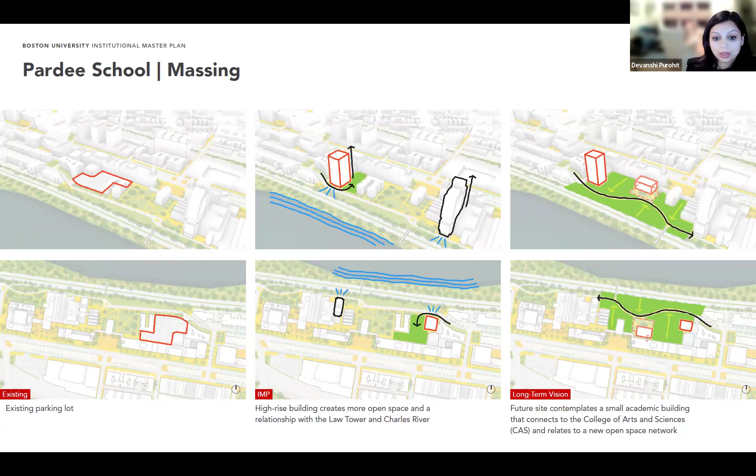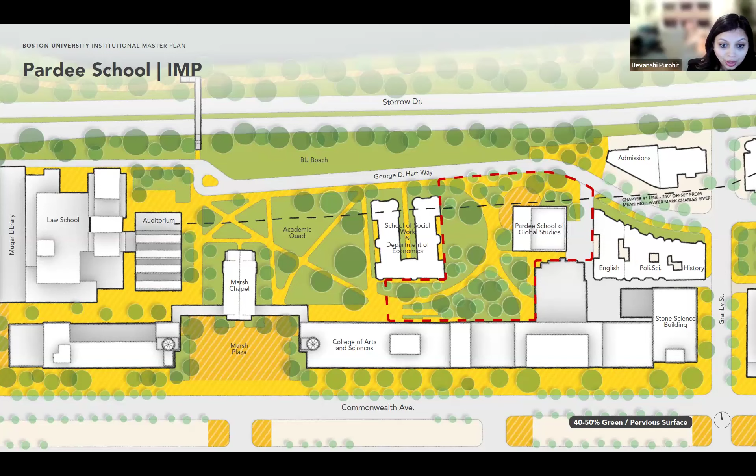This would also enable us to create more programming. We are looking at reading areas, a little entry plaza coming in from Bay State Road, as well as spaces for outdoor gathering and outdoor education, which is much needed for this part of campus. The open space is intended to connect to the existing academic quad and the Marsh Plaza area, creating a more contiguous and seamless public realm.

With this, there is a big urban heat strategy. This plan would contribute to the urban forestry plans of the city, as well as BU contemplating a mass timber structure. They're studying it for Pardee School's construction in support of the university's climate action plan to reduce direct and indirect carbon impact.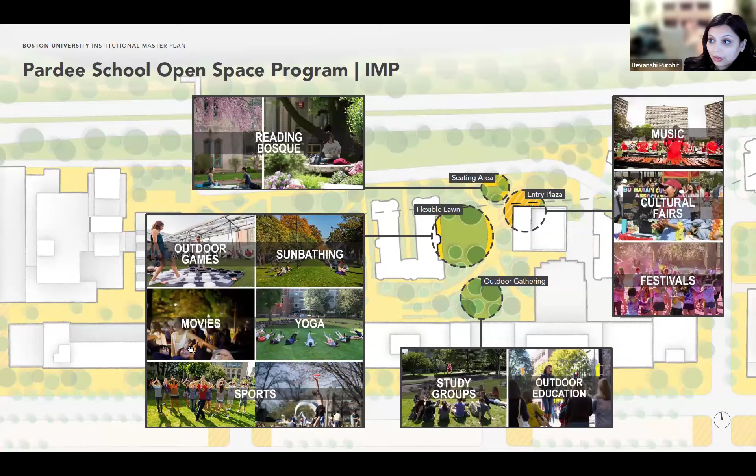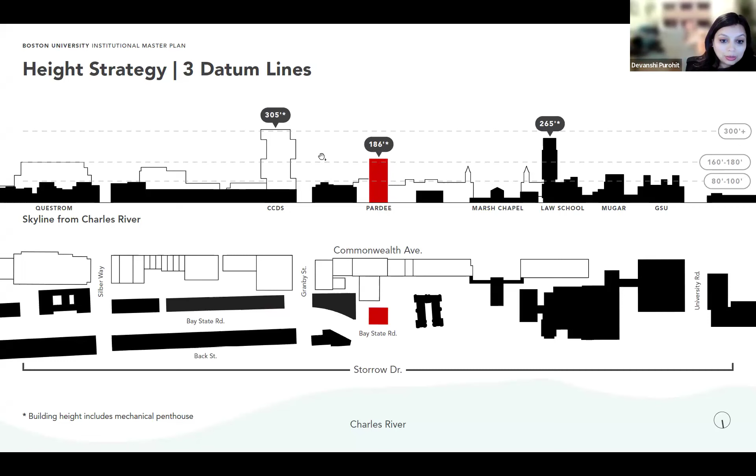Looking at the massing and overall envelope in the context of the height strategy for Pardee School, we've always followed three different datum lines in this part of campus: one being the 80 to 100-foot datum line, the next being 160 and 180, and the third being 300. We're really trying to use the massing to create a slender form that complements the law school tower, and also creates a bookend to the open space we plan to propose there.

And lastly, Mugar Library. This is a renovation project. Mugar Library is one of the core academic uses for the university and has not been upgraded since its construction in 1967. So the renovation is to upgrade the building to current code as well as accessibility principles.

I think that concludes my presentation.

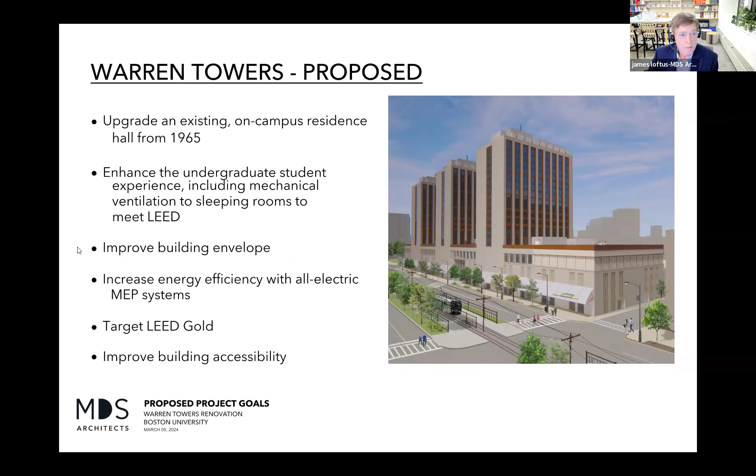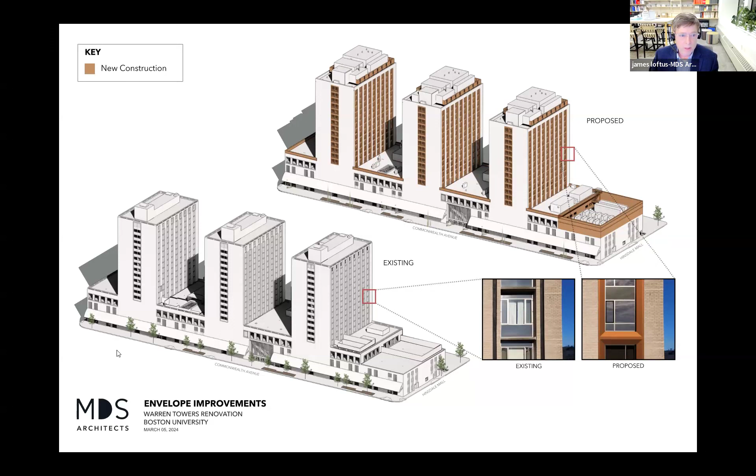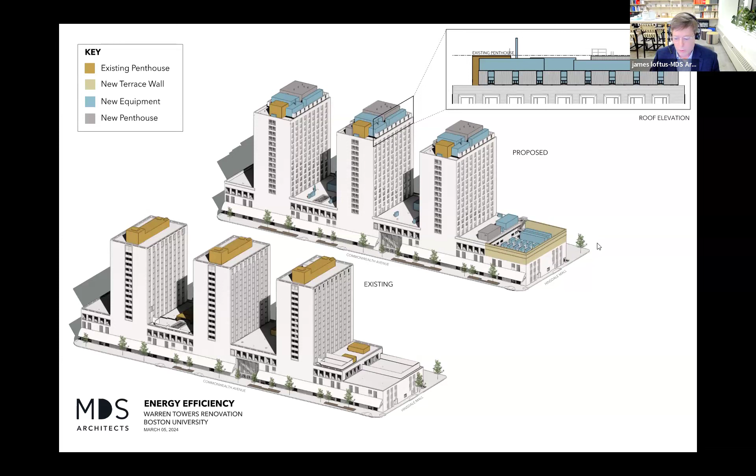James, do you have many additional slides? Just 2 or 3 more. I can be quick. Okay, great.

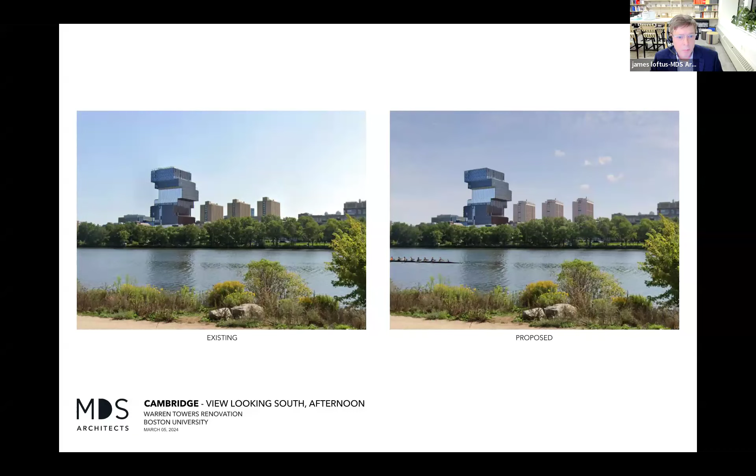Christina, I just had one clarifying question for James. James, in the before and after images you've just shared, the proposed brick appears to be a lot lighter than the existing brick. Is that just a trick of the rendering?

Well, a little bit. The image on the right is a photograph of the brick, and part of what you see here is how different the brick can appear from different angles and different times of day. So this image versus this image when it's in shadow, but it is the existing brick. What you see in the images is to be repaired, repointed, and cleaned.

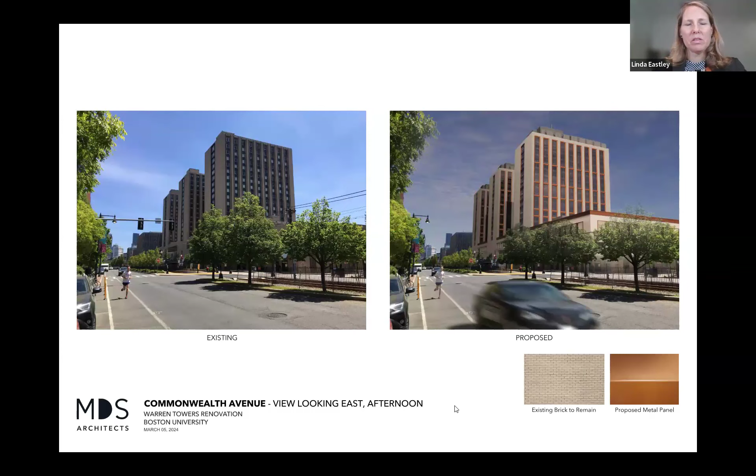Christina, I think we have a few comments from urban design. Yes, we do. Seth, are you ready if we queue up those slides?

Yes, Christina, thank you. Commissioners, before you, with the 2-year extension of the IMP, you saw that there are 3 projects, including the 1 new Pardee School building and the 2 renovations. We are not reviewing the Pardee School at this time as its own ADB project; that will come before us as an ADB project later. So at this point, we are really looking at the proposed building in the context of the campus master plan and the surroundings, evaluating it from almost a zoning perspective to allow for this building to happen as they develop, and then we'll come back with the architecture.

We're very appreciative of the repurposing of an existing surface parking lot into new academic and open space. As this project evolves, we're interested in understanding the specific relationship of the building to Bay State Road, the arced road you see on the left, and the historic buildings in that area. We'll be looking at the shadow impact on the Esplanade, the Charles River, and the surrounding contexts, and looking specifically at the building's relationship to the open space and the surrounding buildings that will be around it. Next slide, please.

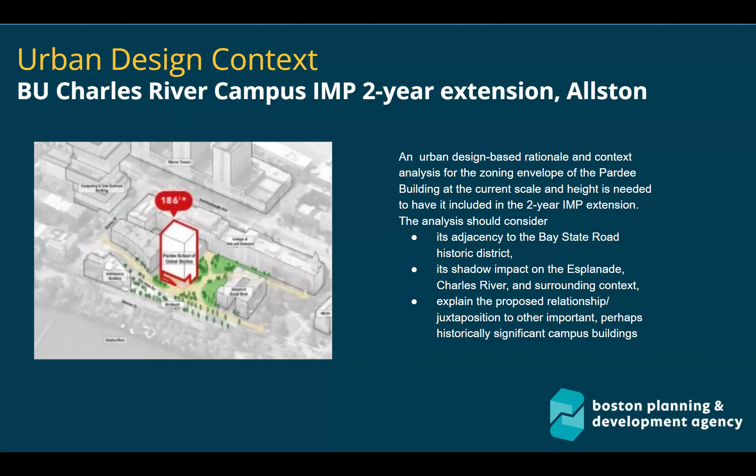Specifically with Warren Towers, we're really excited that BU is embarking on renovation of what I think is the largest dorm in the city. From a program perspective, this is incredibly important for residential use and expanding and making sure that BU's commitment to on-campus housing stays on schedule and on track.

So Warren Towers itself was presented as a separate project, but as you saw, it is a renovation project. And though there are additions to the height of it, additions to the rooftop, the mechanical penthouses, I believe, are kept to the existing height of the mechanical penthouses so as not to exceed that.

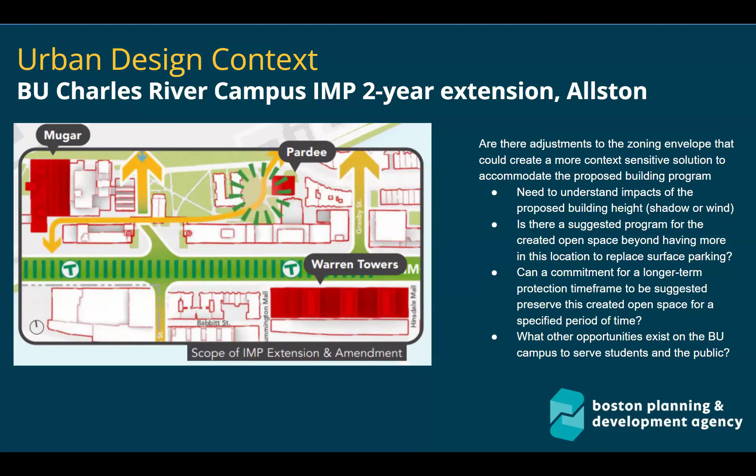So this is a bit of an unusual project for us to be reviewing, essentially two interior renovations and the kind of urban design level massing of a new tower. So, Commissioner comments on the presentation and those three components. Kirk, I see your hand up.

Yeah, thank you very much. Linda, thanks for framing that. But I must say, with the degree of renovation of Warren Towers, which is substantial, removal of a brick pier, elimination of compromised glass block, new profiling of windows. I mean, it's effectively a facadectomy, which is wonderful, because I think it will, in fact, have a great presence.

But I think there are some opportunities to continue thinking about the impact on ComAv, and in particular how the corridor presents itself to the street, whether there are in fact modest things that could be done, projections, illumination, and the context for my comments is in the environment of BU embracing its linearity as an urban TOD campus that moves along a very long one mile stretch. So how Warren Towers hits ComAv to me is so very important at this central campus location, and how it presents itself to the street at the street level, which we didn't hear a lot about today.